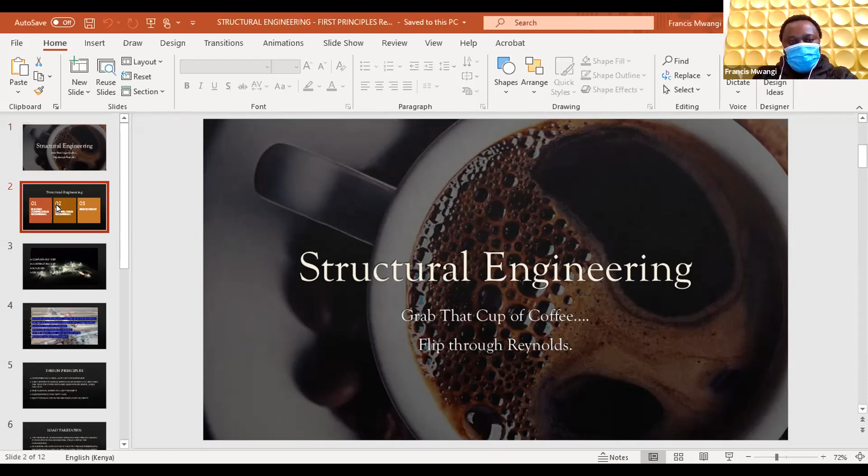So I would say grab that cup of coffee, flip through Reynolds. Reynolds is that book that every other time you'll need for you to be able to do your designs in structures. I hope the presentation is loading quickly.

So in structural engineering, I'll say there are 3 broad categories that one would consider: the building construction engineering. Basically, this is structural engineering for the buildings. You work with architects, quantity surveyors, and the basic built environment fraternity. There's road construction engineering, where you might be involved in box culverts construction.

I think there's been a technical error. Hello? There, he's back. Sorry about that, guys. Engineer, we've lost you a bit. Hello? Yes, we had lost you. I think you need to go back to the second slide and just rush fast. Poor connectivity on my end.

We were on the second slide where we say that there's building construction engineering. This is construction where we are working with the built construction industry members. There is road construction engineering where you might be involved in box culverts, normal culverts, and of course there is bridge design. All these are elements of structural works that you might be involved in. On to the next slide.

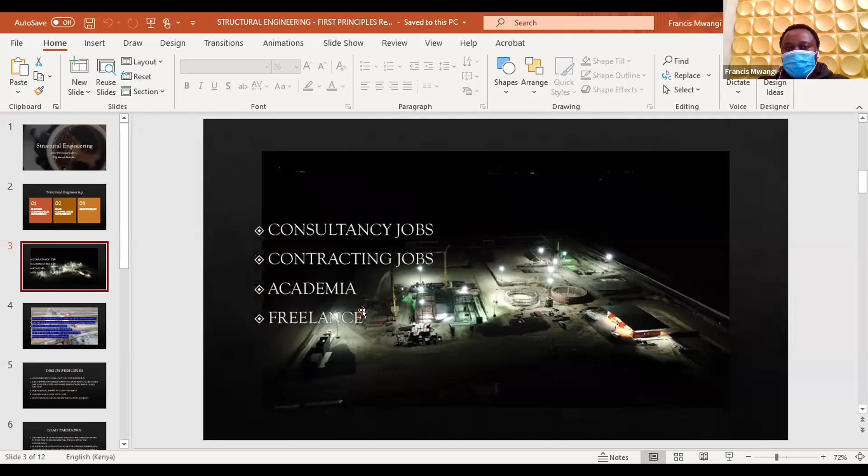The other area where you might find opportunities is academia and freelance. As somebody rightly mentioned, you might get chances to do your projects as PJs, personal jobs. You need to actively look for those because they will determine how well you are able to navigate in this engineering world.

So how do you go about it? I would say look for that opportunity and then play the hand you are dealt. When I was leaving school, I knew I would be a civil engineer all through my life. But when I was looking for that opportunity, I was unfortunately not able to get a civil engineering post. So what I got was a structural engineering post, and I had to work through that to ensure I was agile enough to take what I was dealt and come up with something.

I hope this is still clear. It's telling me I'm unstable on my end.

The hardest experience to acquire is the first 3 months. So if you get any opportunity, just pick on that opportunity. 3 months down the line, you could always decide on what you want to do with your life.

I would say keep your campus notes very close - the TOS notes, the traffic notes, and in this case especially the design notes that you have. Those are going to be critical as you start your first 2 years.

Attend the mentorship programs. You've been told before in the keynote - attend the mentorship programs, and then choose the ones that suit your profession.

I would say also know where to refer. People and books are your resources in your first 2 years. After that, you are supposed to be able to handle the projects on your own. I would also advise you to register as a graduate engineer at the earliest possible.

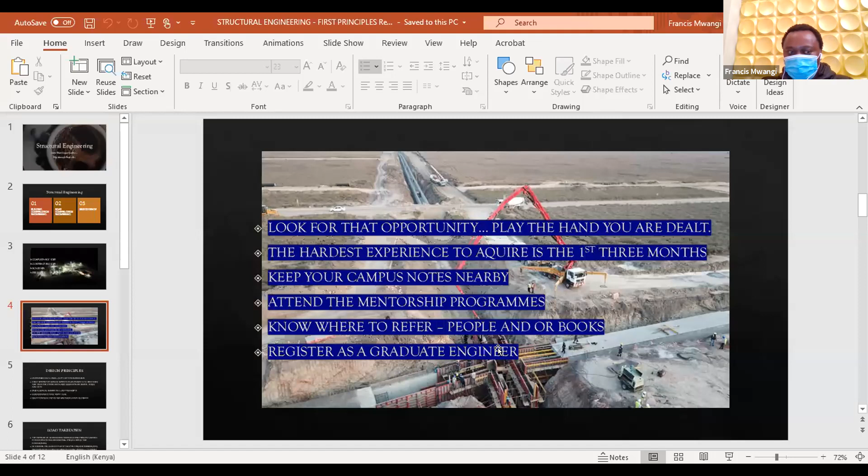So what do you need going forward? In design, you need to know how to design the elements, one at a time, just like the notes state. Start with the roof design, down to the slab, beams, columns, bases, then other ancillary elements like ramps, stairs, and lifts. The most critical element is load takedown.

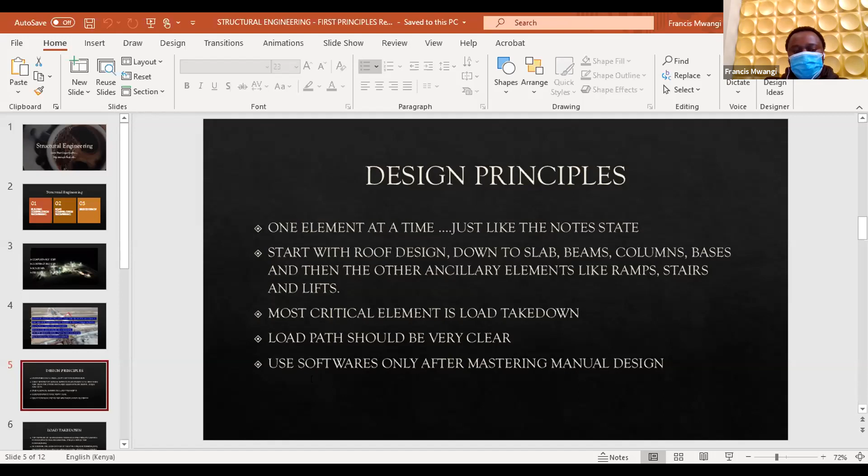The load paths should be very clear. Load path basically means how the loads are being transferred from the topmost level all the way to the foundation. It is also advisable to know how to use softwares in your design, both for design and presentation of the same, but those are advisable to be used in subsequent years after you have mastered the manual design.

So what is load takedown? This is the exercise of determining the loads that will be carried by the structure and carrying them down to the foundation. Basically you determine the loads carried by the floors, and those are transferred to the beams. Beams take them to the columns, columns to the foundations, and then the foundation disperses the weight to the ground.

Determine the design code to use for loads determination. The BS codes, Euro codes, or American codes can be a good start. There are very many other codes, and it all depends on where you are designing your works from. When the Kenyan standards are fully developed, then we are going to move to the Kenyan standards - they'll be the guiding codes for design purposes.

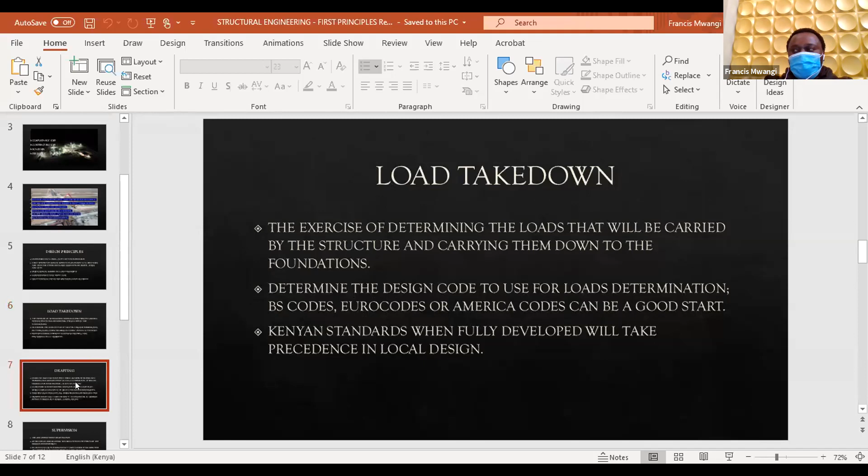After you're done with your design, then you should move to drafting. Basically this is presenting the works that you've done. You should learn to draft in your first 3 months, whether you're working in a design office or for a contractor. It will be critical for registration.

Please note that all these first 2 years that you're working on, you're trying to build a career for yourself. In that building of a career, you will eventually require to register to have the full benefits of engineering. I would say learn basics from personal initiative and then move to more complicated stuff with help from those with experience. This is what I did - I just took YouTube and went through the AutoCAD basics of drafting.

I think he's gone silent again. Engineer, can you hear us?

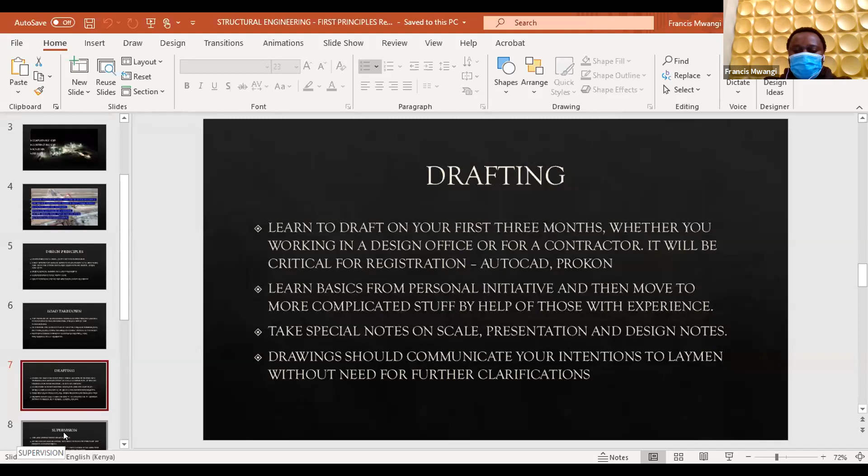Drawings are what will communicate your works to the external audience. Basically, your drawings should communicate your intentions to laymen without the need for further clarification. If you have sent your drawings to the site, you don't have to be on site to explain to the person laying the formwork or doing the steel. You don't need to be on site for them to understand your intentions. They should be able to pick up on this, and you are only required to go there to do confirmation through supervision, which would be the next thing.

The aim of practice is registration, and of course, enjoying the full benefits of the profession. So after design and drafting, you need to follow up through the project by supervising. Be guided in the supervision process by either your employer or a mentor if you don't work in a design office. There will come a point where you find yourself with a side hustle you've been working on, but you might be employed in academia, or employed in a contractor's site office. So you might need to get somebody else who would take you through the supervision bit. You need a mentor, because you wouldn't do supervision on your own, at least for the first 2 years.

I would say pay special attention to reinforcement spacing, cover to reinforcement, and formwork placement. Basically, formwork for engineers is just to determine the size of elements. If the column is given as 200 by 400, the formwork will determine that.

For cover to reinforcement, ensure that you have spacers holding the rebars back from the formwork. For reinforcement spacing, just follow the drawings and ensure that what has been drawn is what is being implemented on the ground. And critically, check reinforcement overlaps.

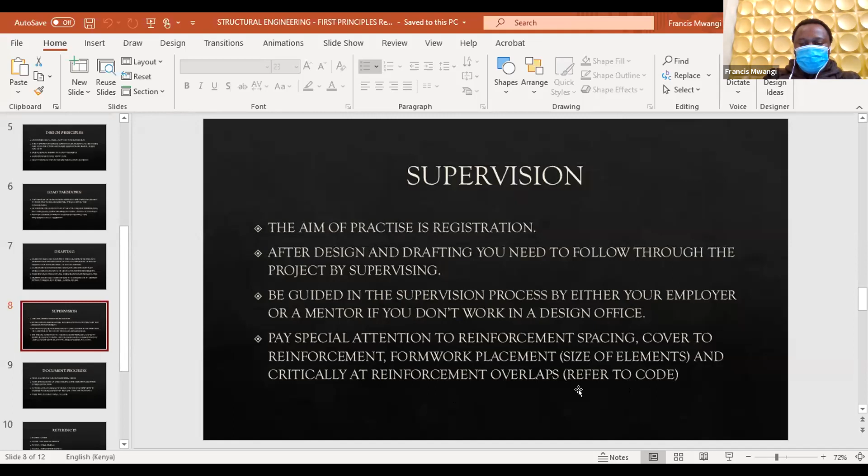When you have elements where reinforcement cannot run through, like a 13-meter span, and the rebars available in the industry are 12-meter spans, you need to know where to break the rebars so that you have adequate overlaps. It's advisable to get this information from the design codes. If you're using BS standards, you would get that in BS 8110, for example.

You need to document your progress as you go along in practice. The first 2 years are where you'll find most of your challenges, and you need to document those challenges well enough to present them to the team that will finally be assessing your registration. I'd say have a logbook for documenting tasks, note everything you are doing, and take special note of challenges in the industry and their possible solutions.

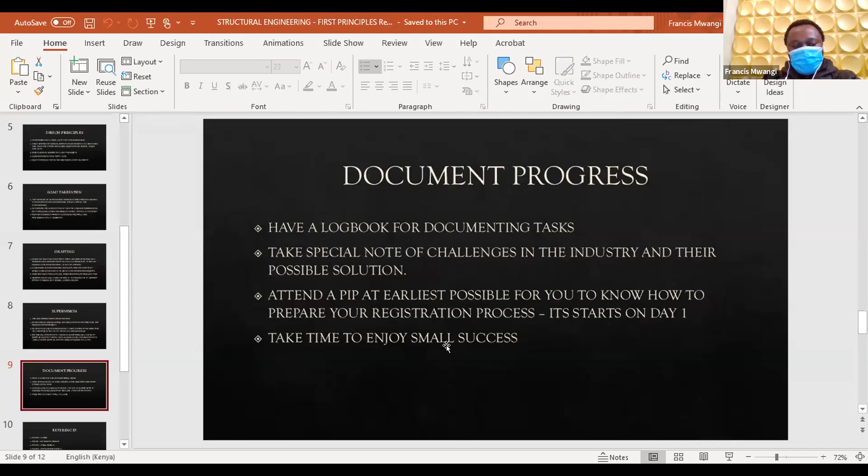I would also advise members to attend professional interview preparation at the earliest possible time, to know how to prepare for your registration process. Remember, it starts on day one, not after 5 years. If you get the chance, start at the earliest possible. I would also say take time to enjoy the small successes. If you've been involved in a project that is finalized, remember to pat yourself on the back, because that was due to your achievements and your strength.

The references that might be useful as you start your first 3 years would be the British Standard Codes in Kenya, and Eurocodes, which we are in the process of adopting. For load calculations, you might refer to BS 6399. Then there's BS 8110 for concrete design, BS 5950 for steel design, BS 8004 for foundation design, BS 5268 for timber design, and BS 5400 for bridge design. I would advise members to look for Eurocode equivalents of these to have an understanding of what the industry is about.

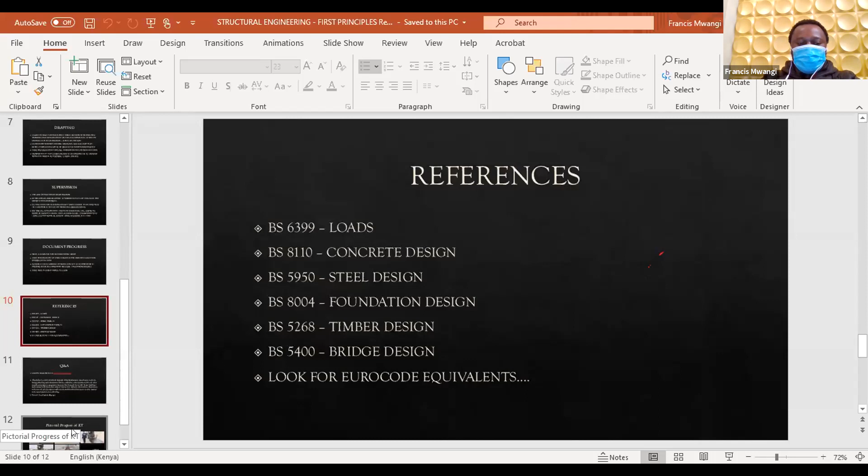I'll jump the question and answer session and go to a few of the things we are doing at Konza Technopolis. The first frame, if visible, shows we are in the process of laying a GCS on site, that's graded crushed stone. The second picture shows the utility tunnel, which will host most of our utilities, including that water pipe there, a potable water pipe.

On the other racks, we are going to have solid waste systems. On one side we'll have the wet utilities, and on the other side the dry utilities. We have bitumen spraying, which will be explained better by whoever is taking roads or materials. GCS again on another section. The middle frame below is a junction of the utility tunnel, and on the extreme right is the water reclamation facility, or sewer plant if you wish.

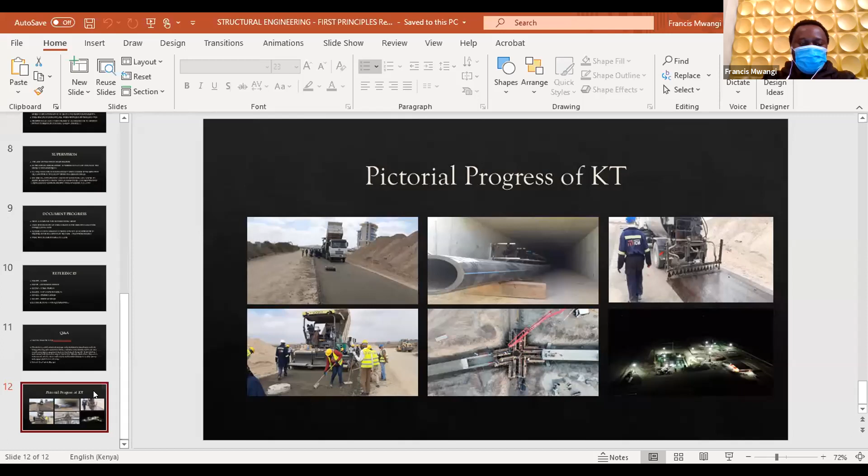So I would take questions and answers, but if my minutes allow, I might want to present to the team a video of what we are doing at Konza Technopolis as I close it off.

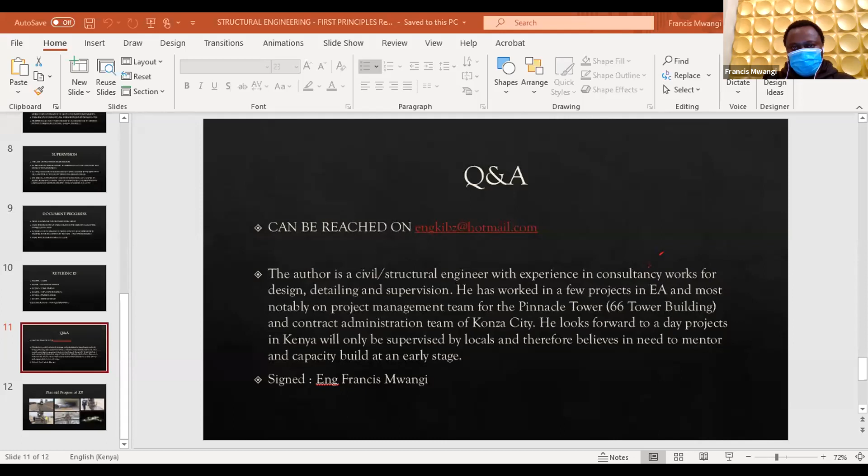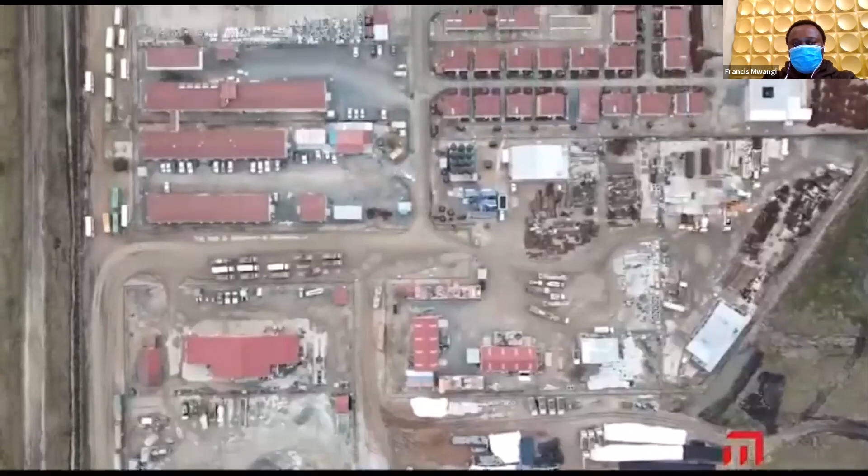Is it visible now? Yes, it is. Okay, so this is the contractor campsite for the main project that we are doing. It's a 40-kilometer street network with water and all the other subsurface utilities, basically the horizontal infrastructure for the project. It has both the offices and the accommodations for the contractor.

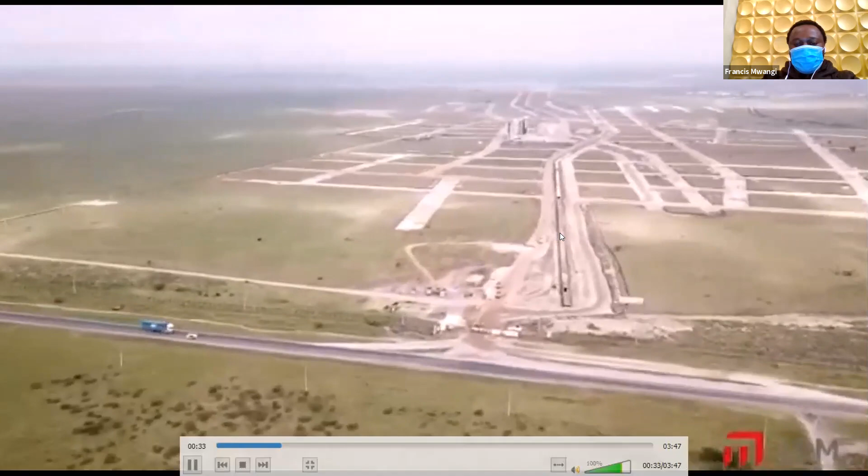And that is Konza Technopolis. Just before you get to Konza Technopolis, there's Mombasa Road, and then those are the roads that we are doing in the city.

You'll note that the utility tunnel I was talking about has been partially covered. There are some sections that are already done, and backfilling works are already ongoing in those.

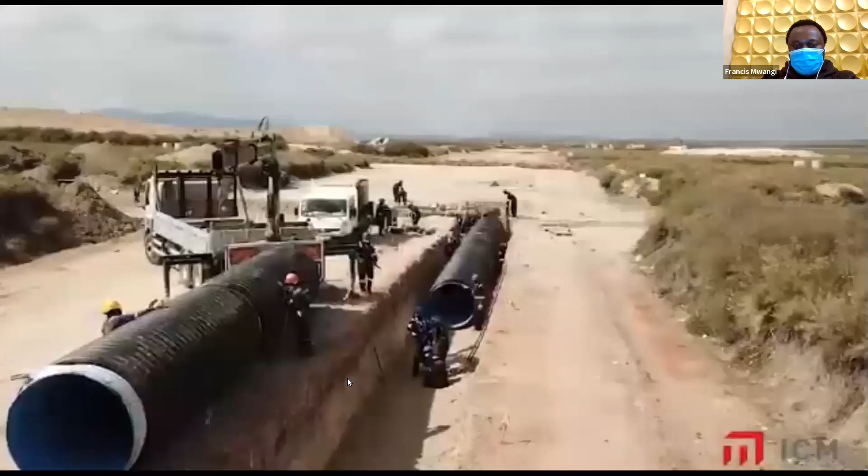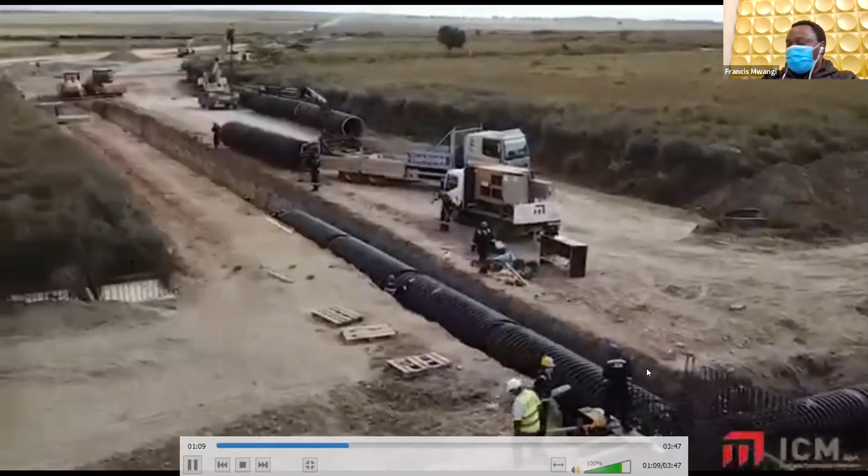You have the subsurface utilities. This is a stormwater drain pipe being placed, and welding happens at the junctions for it to have connectivity with the manholes.

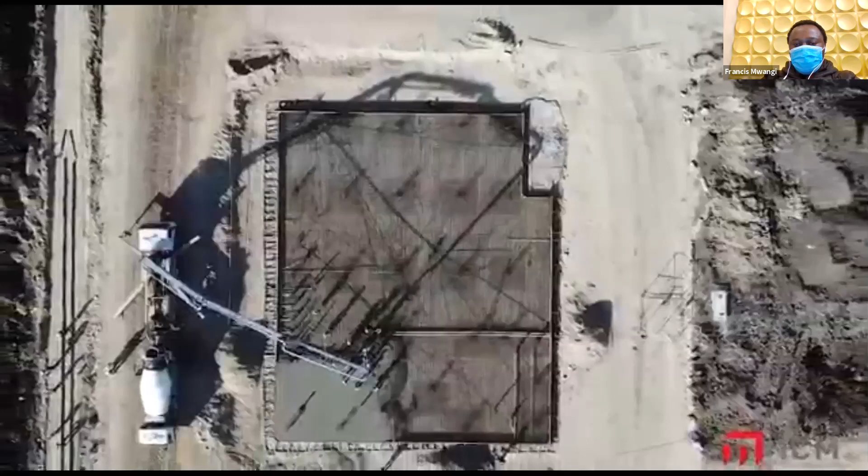This section here is the water reclamation facility, or sewer treatment plant if you wish. That's the progress. That's one of the mechanical offices. It was being cast.

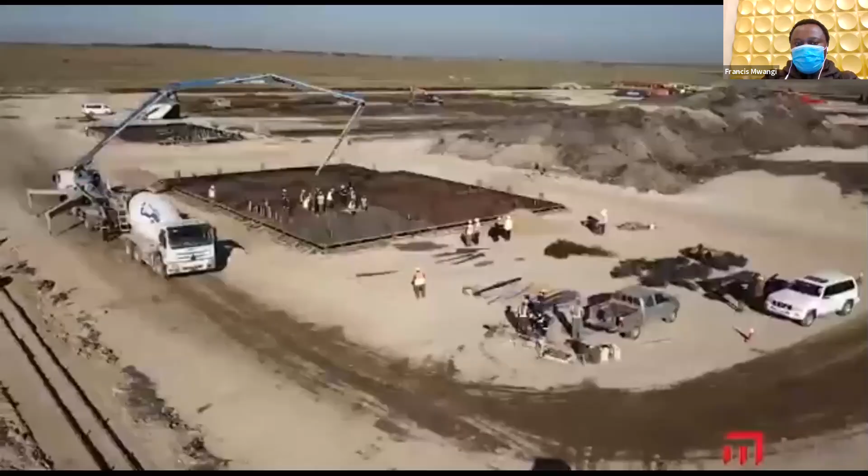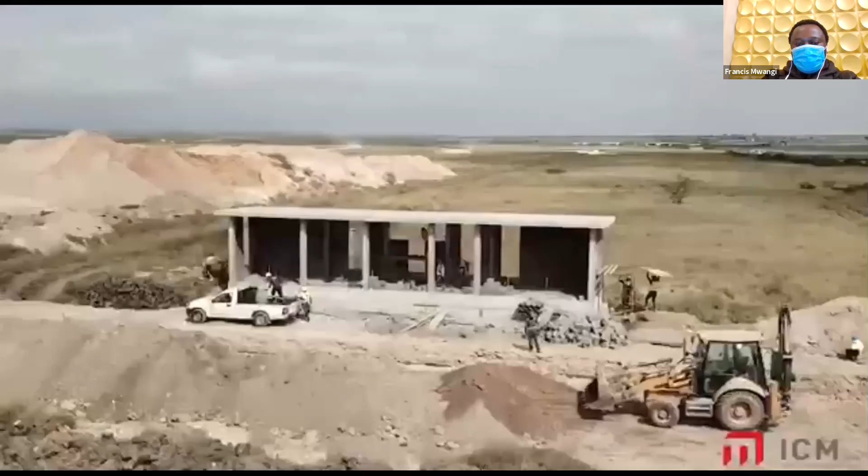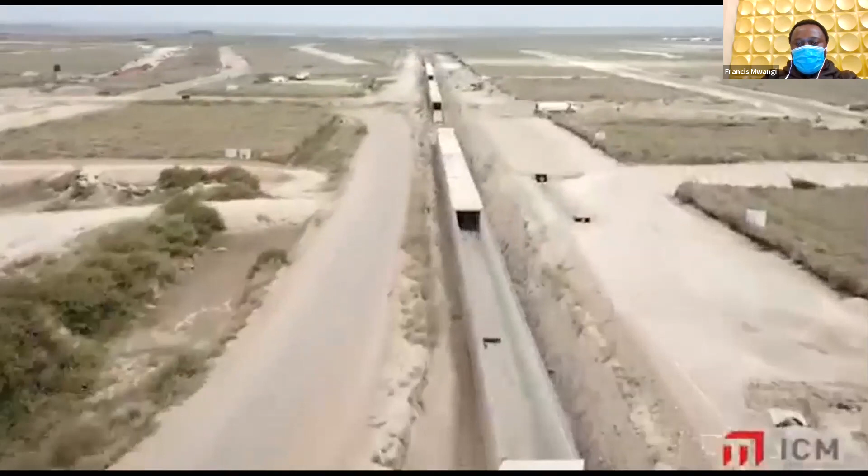The progress is two months late in this video, so there are some things you'd note in the pictures that have progressed much further. These here are called electrical cabins. It's where the electrical transformers will be placed for reticulation of power to the parcels or plots.

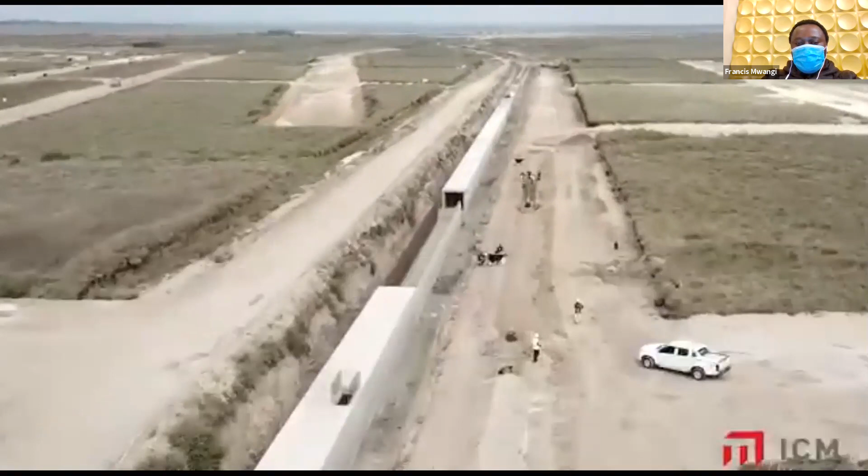That's part of the utility corridor. It runs across the whole city. As we said, we need the utilities below ground, and whenever we are doing repairs, we don't want to be cutting the roads or something of the sort.

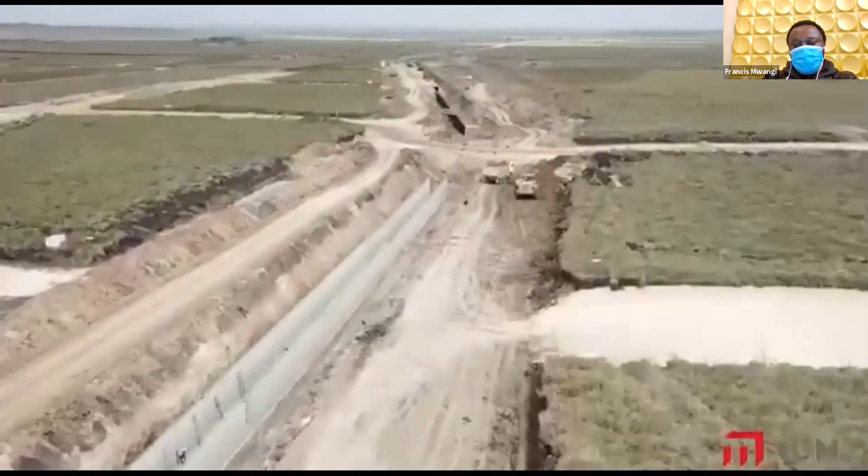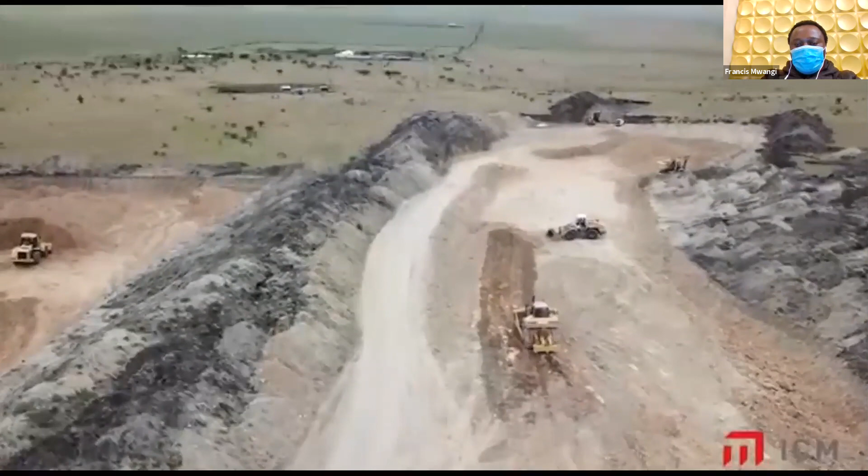This is the section that will have our water treatment plant. The water treatment plant is envisioned to cater for the 200,000 to 300,000 population that will come into the city.

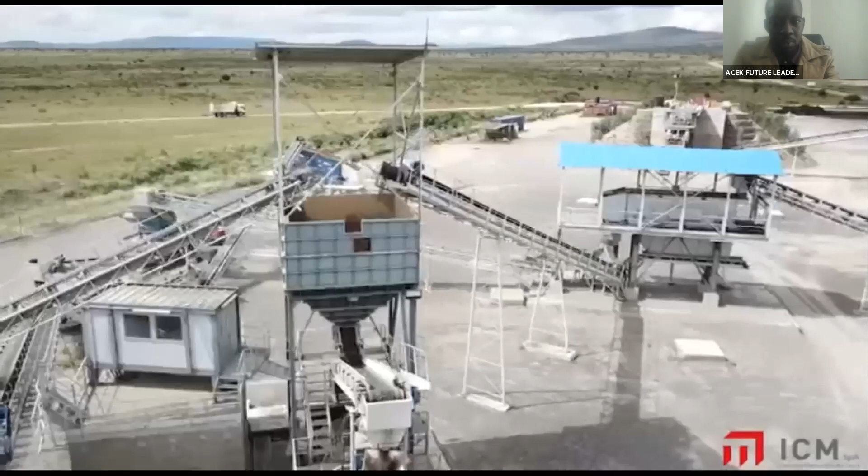That's the quarry crushing, the crushing plant at the quarry. This is off the city on the Kajiado side.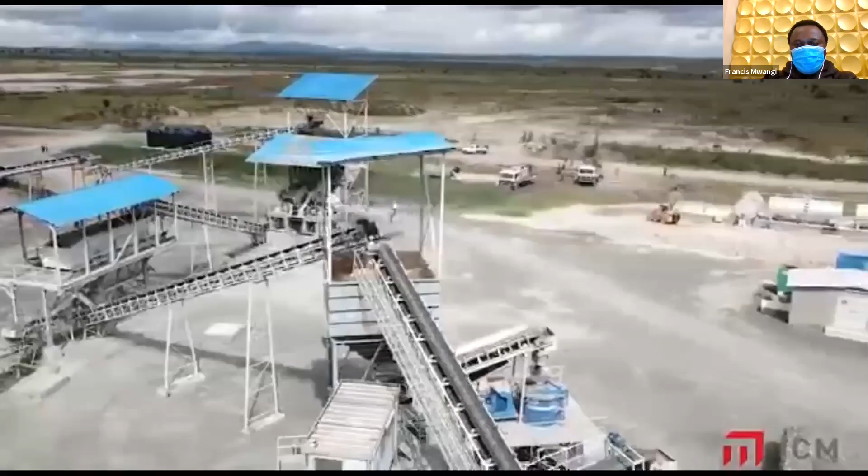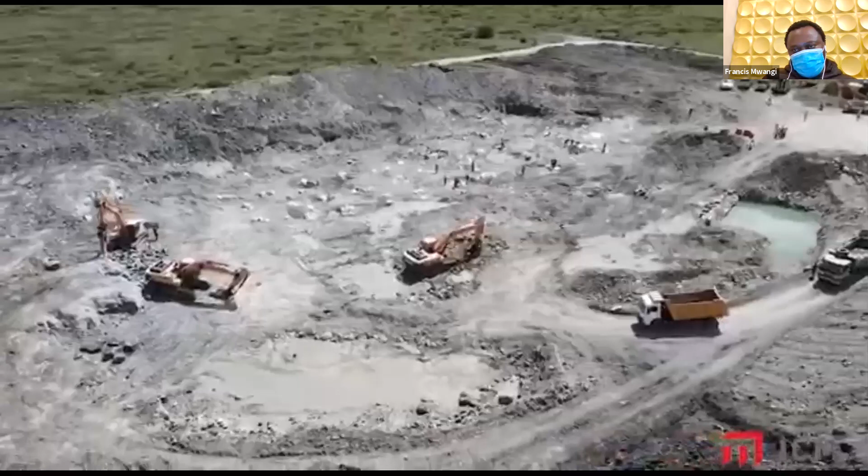In the background, you might see the SGR station, the Konza SGR station. This is the quarry site where we are borrowing our rocks from, and the rocks are gotten by blasting.

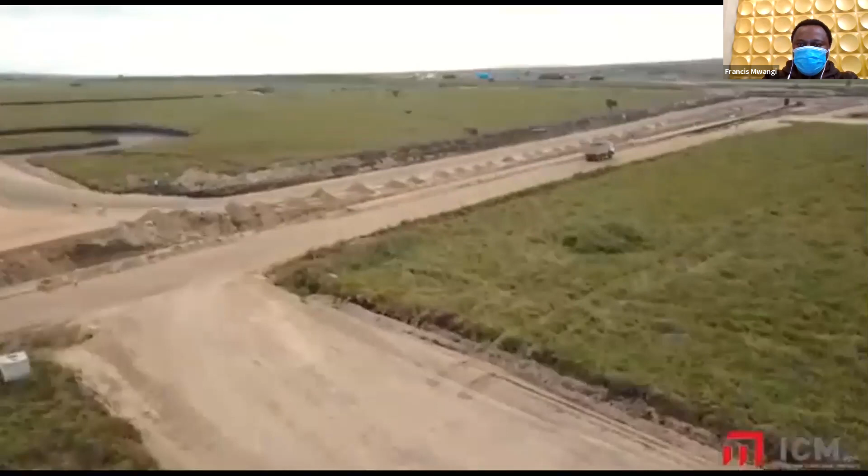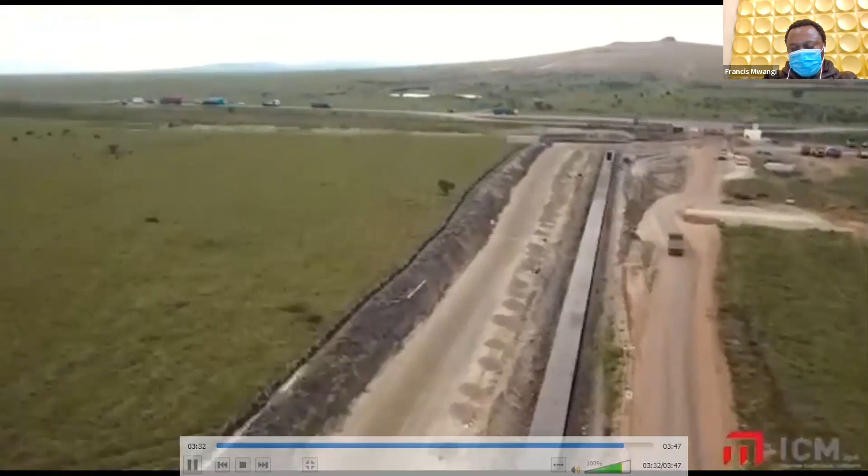Material is transported back to the site, of course, for laying on the different areas. So that will be it from me. Thank you.

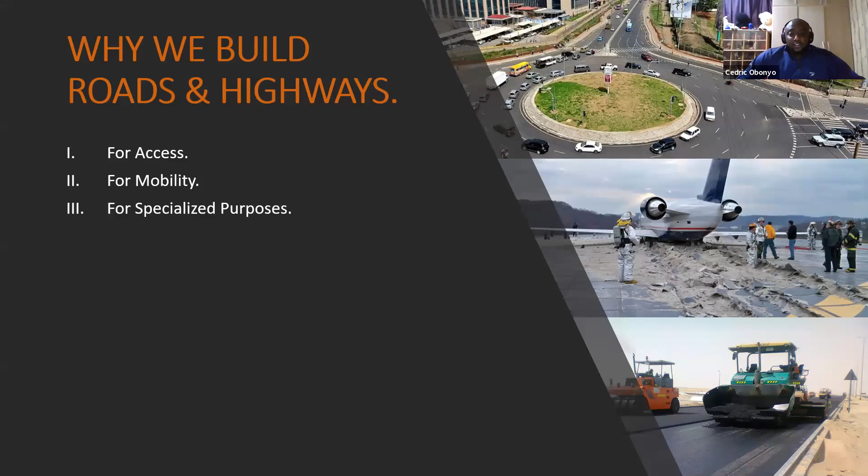Now, in the first 2 years, you are going to interact with something called, or rather I put it to myself as the expected, unexpected interactions. You're going to have interactions that you would not even imagine in your life you're going to have. Yet the reality of the matter is they're expected. Number one, you're going to have a lot of interaction with very senior and experienced engineers in the industry in highways and roads. Some of them have practiced for many, many years, 20 years, 15 years, 30 years. And you are there fresh from college, you want to try your hand in highway engineering, you're going to interact with those individuals.

Also experts from other sectors, like for example, experts from the claims sector, experts from environment, but these are individuals who have been there for a long time. Actually, in Kiswahili, they say, wamekula chumvi. They've been there for a long time. Also, you're going to interact with skilled workers that have been operating these equipments we see on the road for many years. Some of them, they tell you they're working in Malindi in 1978, and they're still working today, an operator. So you're going to have to interact with those kind of people.

And also, you're going to interact with those non-skilled workers, people who have just been told, come now, here's your daily wage, start doing this. So as an engineer in the highways section, transportation, you're going to interact with all these people on a daily basis.

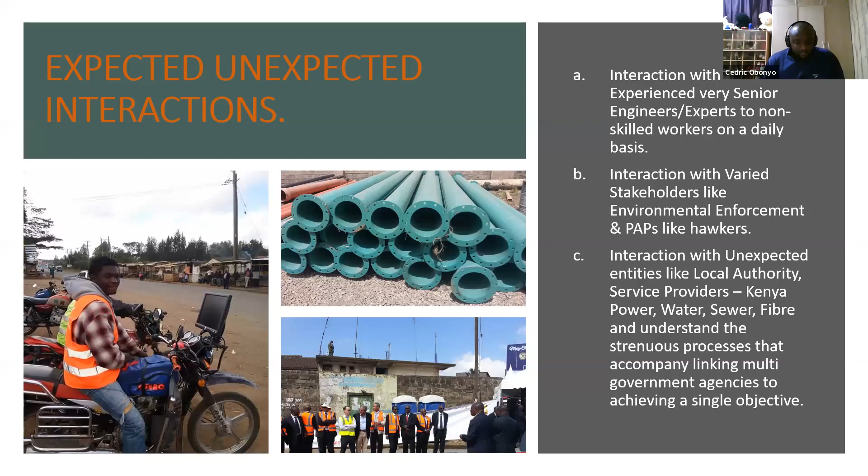Now, I'll talk about your working environment. The first 2 years, immediately you leave college, you're going to throw yourself into a working environment. The first thing that hit me when I left college is the long hours of work that you have to put in highway and road construction. This is because of numerous variables and fixed elements. For example, there's the weather elements. You plan to do work and then, like now, we have July and September, so most road works doing earthworks have stalled somewhere.

There's also specialized material that we sometimes use in road construction that is imported, and it delays in coming. And then the timelines of execution: some of the programs that you're given by the client to implement are very squeezed. So you have to put in a lot of hours of work to achieve them. So you need to be ready to enter office at 6 o'clock in the morning and leave office at 7.

For me, for example, when I left college, the first job I got was the Kisumu International Airport rehabilitation. I used to get in to work at 6 and leave at 9:30, 10 every single day. So that is the environment you need to be prepared for. Prepare yourself to find yourself inside it.

The second item in the environment you'll find yourself in is you're going to encounter severe ignorance from the public in terms of road construction. For example, news reporters will come to site and they don't know the difference between an excavator and a grader. So they call everything a bulldozer.

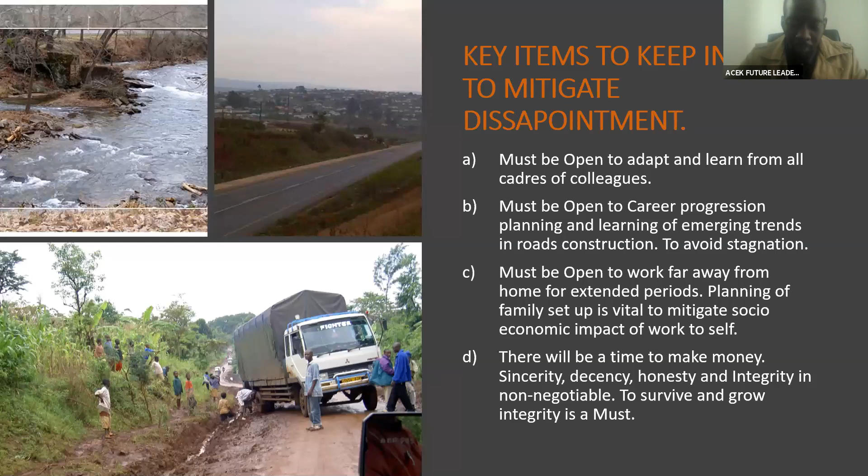Now, when you're doing engineering school, it is open for you to do structures, water, or highways. So I asked myself, why would you pursue highway engineering? Number one is the satisfaction that comes with the before and after. When you go to site or design a road where there was nothing, and then see the final product, it's a very, very good feeling. Number two, the satisfaction of impacting society with amenities and facilities that shall be used and exist for many years.

Meaning, you are going to do work that is going to exist beyond your own existence. Because these roads and highways are designed to last for more than 100 years. So you're going to create an impact on society that is going to last a long time. So it's a good thing, I think, to do something not for yourself, but for society. Number three is that when you do highway engineering, you're going to expose yourself to a lot of diverse environments and cultures, and you're going to meet very many people.

I remember when I left college, I was taken in when they were doing the Kisumu airport. My RE was a Boer from South Africa, Mr. Patrick Keynes, I've not forgotten him. The surveyor was a guy from the Netherlands. So the cultures and the people that you interact with when you're doing highway engineering are so diverse, because our road projects have a lot of different people from all over the place.

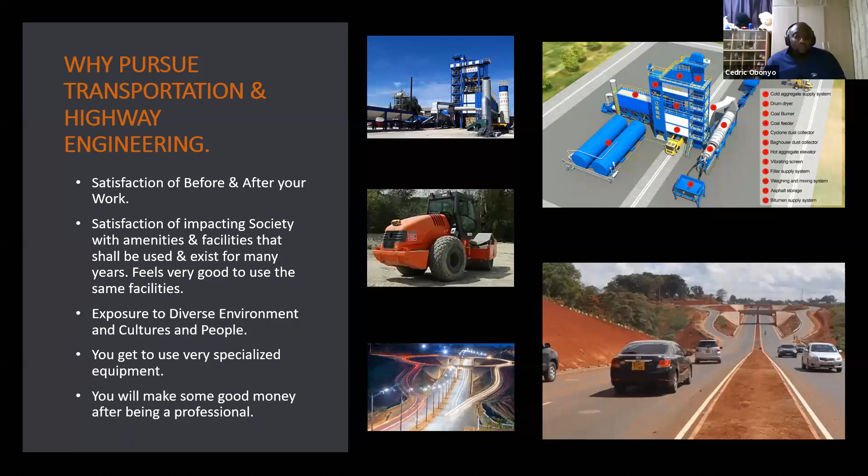Now, that is why I end my presentation on the environment within the first 2 years. I didn't want to bombard you so much, but I hope you enjoyed it. And if the moderator will allow me, I'll just show you a few photos of what I've been talking about. Engineer, can I do that?

Yes, as long as it's fine. Wait, is that? Sorry. Sorry. Just a minute. Oh my God. How do I? I'm trying to get it. Just a minute. You can do it a bit later. Yes, fine. Let me look for it. Okay. I promise I will allocate you some space. Okay. It's fine. Thank you for your time, and I appreciate it.

Thank you so much, Engineer Cedric Obonyo. I too had been privileged to work on a highways project. Sorry, I'm the coordinator, I'm still admitting guys. I was privileged to work on a highway project, the Thika Road, Lot 2. And there's one point you mentioned about ignorance from the public. I faced that as a very junior engineer on Thika Road. So on Thika Road, this is what used to happen.

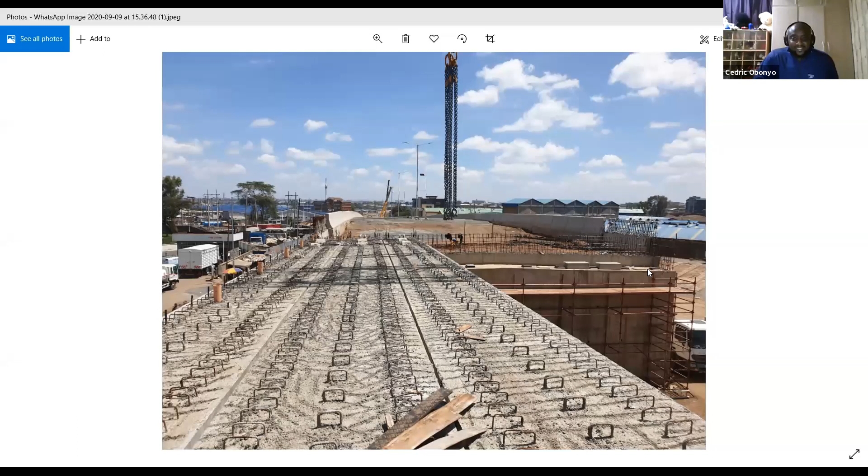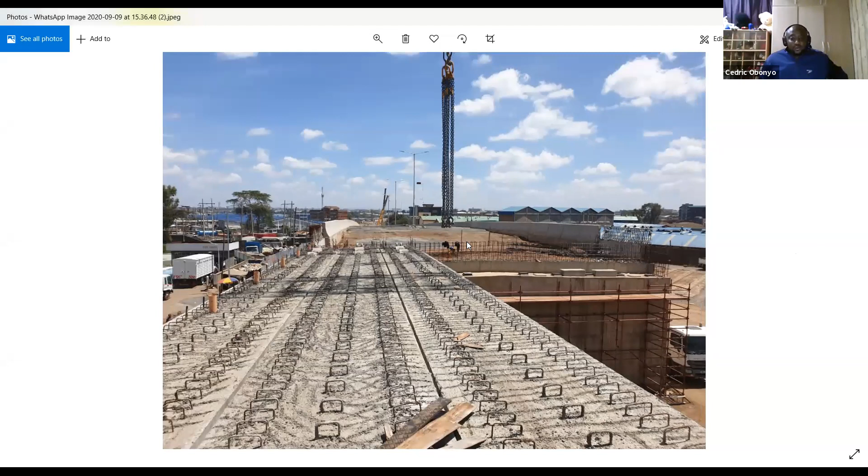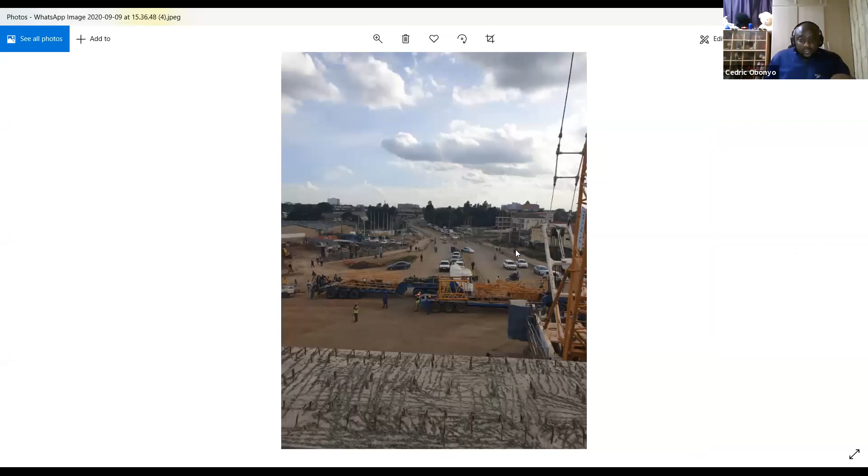So we had to change it. We could not do it. So we tried to go above the sewer line, to separate the traffic above. So we were doing beams. You see these are beams; there were 30 beams across the deck, and each beam was actually 200 tons. It was a post-tensioned beam, 200 tons per beam. But the beams were not cast on top of the structure. The beams were cast down.

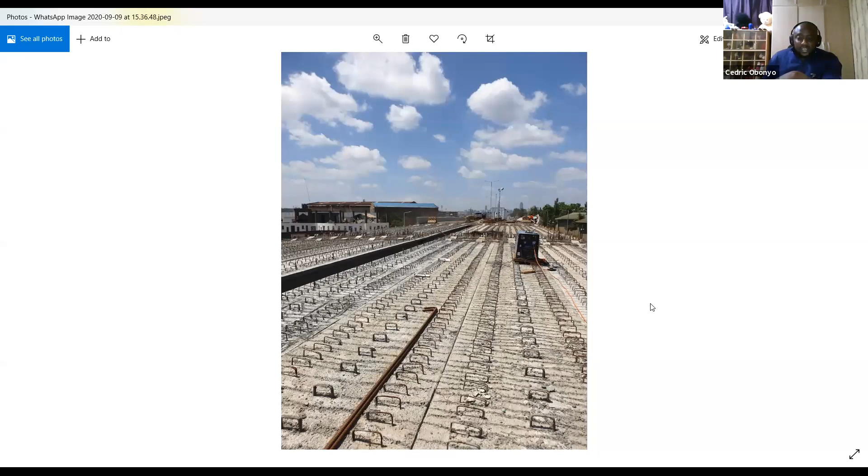That is why I was telling people highway engineering is very interesting. The beams were cast down, and then we had to lift them to come on top of the bridge. So this crane that you are seeing here is a crane that can lift almost 260 tons, a 260-ton capacity crane. So this beam here was about 194 tons. So they were cast here. Can you see my cursor?

So this was the casting yard here. So we cast here, then you bring it down on a dolly, this truck here, and then you lift it with the crane, with, of course, people controlling with some ropes on the side, and place it here on these piers. So it was very interesting, because it's something that is very hard to experience somewhere else apart from in highway engineering. What else?

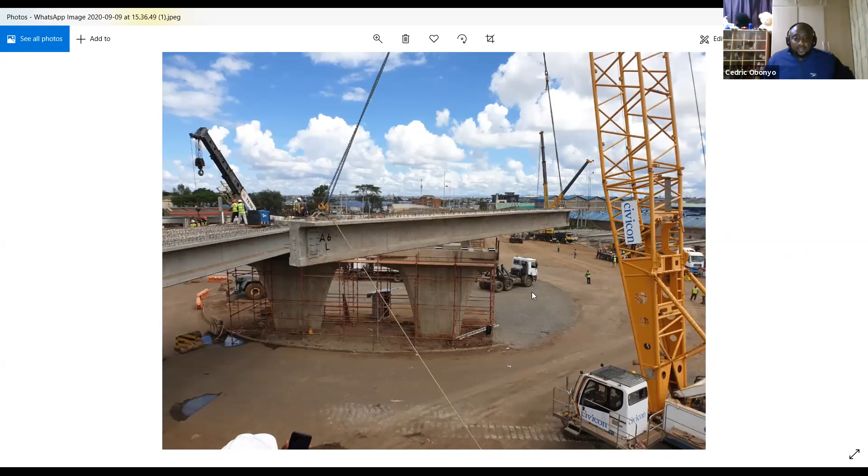Sorry. So these are us now placing the beam. So you are placing 1, 2, 3, 10. There are 3 sections, so 10, 10, 10 to make 30. And then this is just a short video of the crane lifting up the beam to place it on top here. So the crane lifts it and places it here.

I think for me, that's what I wanted to share, just to show the people that it's very interesting to do highway engineering. Really get to experience these kinds of things. Thank you. I'm done.

This GIS will help you map all the pipelines, sewer lines, utilities, and appurtenances, and you'll create an effective geodatabase that helps with efficient maintenance and future development and expansion. So when other branches of engineers want to do development, like a road or something, they'll just come and say, give us your geodatabase. You'll just produce that database and they'll know everywhere what is where, so they don't get shocked when they excavate a place and sewage spills everywhere.

It also helps in designing profiles, especially when you want to do a new pipeline. There's a tool in QGIS called the profile tool. You just key in elevations and coordinates, and it gives you the image from the satellite, draws the pipeline where it's supposed to pass, and plots the profile very nicely without so much fuss.

You won't even need many surveyors, you may just need one more person and your GPS. It also gives you good ways and routes for repair works, pipe bursts, and satellite links, so you can always do survey and link other works that people have done in that area and place.

And number 4, we have wastewater. This is environmental engineering, and this is the area that I love so much with all my heart.

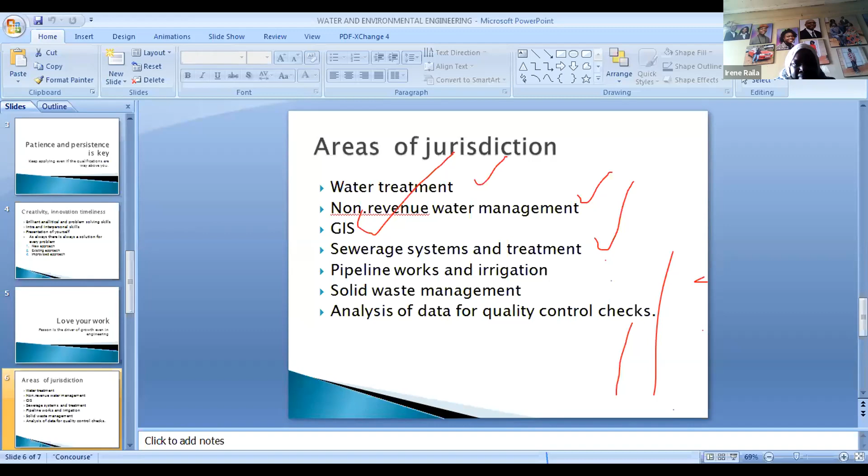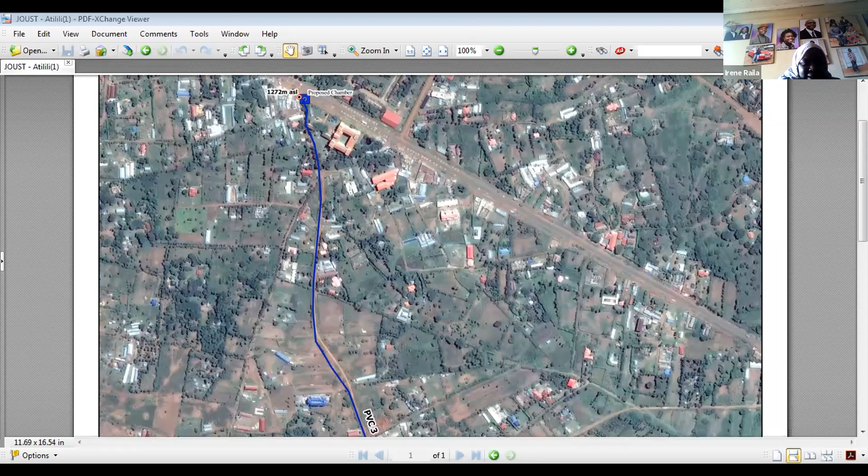I want to say to the people: get registered. When you get out, immediately get registered with the professional bodies and work closely with senior engineers for guidance and learning opportunities.

I wanted to ask most of us, as we do career progression in water and environmental engineering, to please take an interest in solid waste engineering in a deeper look, because you can see it is being overlooked, and you see the way solid waste is really treating us in an abnormal way. Yeah, thank you.

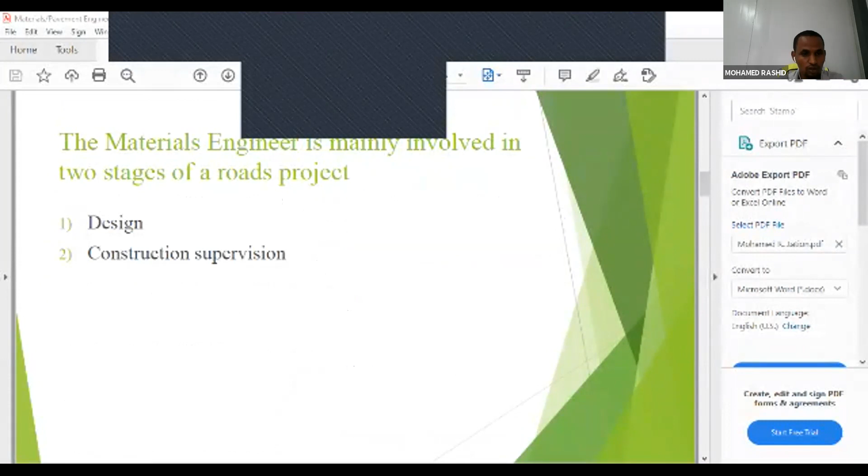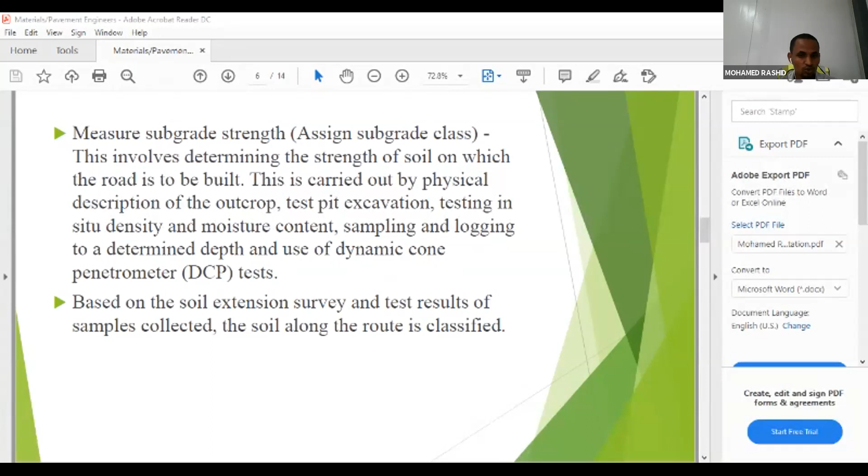Measure of the subgrade strength. When we say subgrade strength, this involves determining the strength of soil on which the road is to be built. This is carried out by physical description of the outcrop, test of what we call pit excavations. This will help us assess the vertical change in soil profile, and also visually you are supposed to delineate or subdivide your alignment into soil, according to how the soil changes. Remember, you are dealing with nature, and nature is not uniform.

So you are supposed to also do test pits in order to assess the vertical change in the soil profile. You are supposed to take samples from those soil pits and do laboratory analysis. You are also supposed to do in situ bearing capacity testing using a device called DCP. Based on all this activity, we assign a subgrade class. This will also form a major component in the design of the pavement structure.

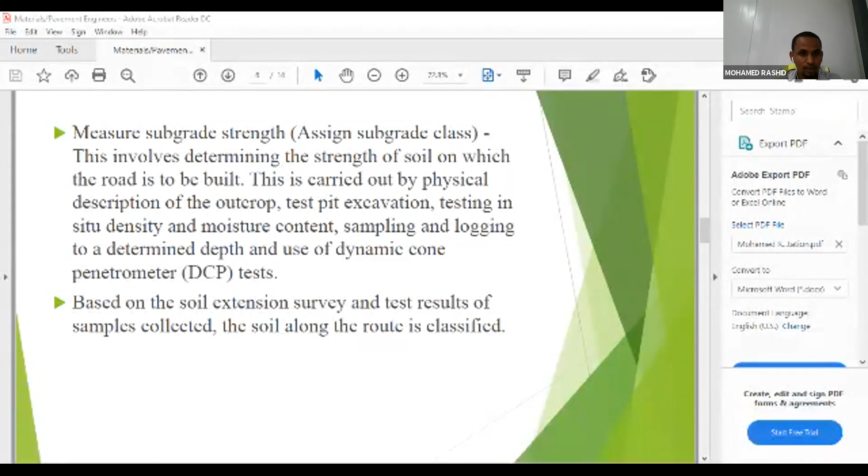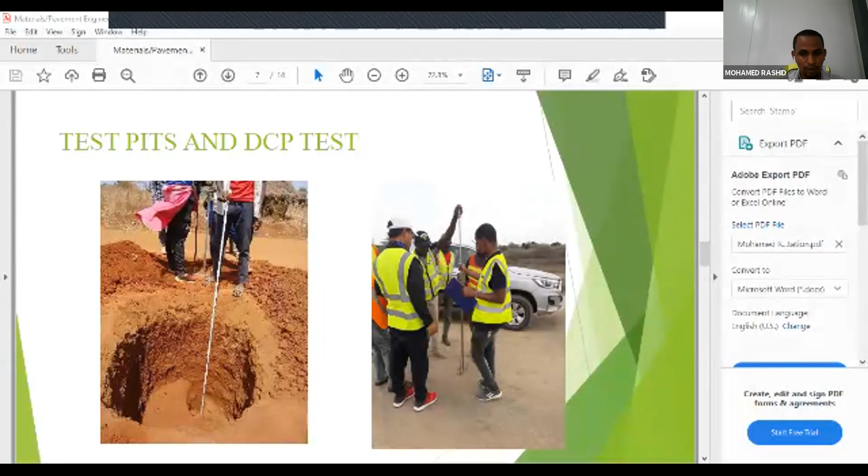So as we move to the next slide, it shows how the test pit looks like, and also how a dynamic cone penetrometer test works. This will help you measure the subgrade in situ bearing capacity, giving you the in situ bearing capacity.

The next activity is the choice of materials. Remember, we are supposed to build our embankment or pavement structure above the ground, using naturally occurring materials or gravels. So as a material engineer, it's your responsibility to source for those materials. We also need to remember that availability of suitable construction material within the project's vicinity plays a vital role.

So it is the responsibility of the material engineer to source for construction materials, and also to assess the quality and quantity of the material. What you need to know is that during road construction, contractors are paid for haulage. That's why the government or client hires a material engineer, to ensure we have suitable material within the vicinity of the road alignment.

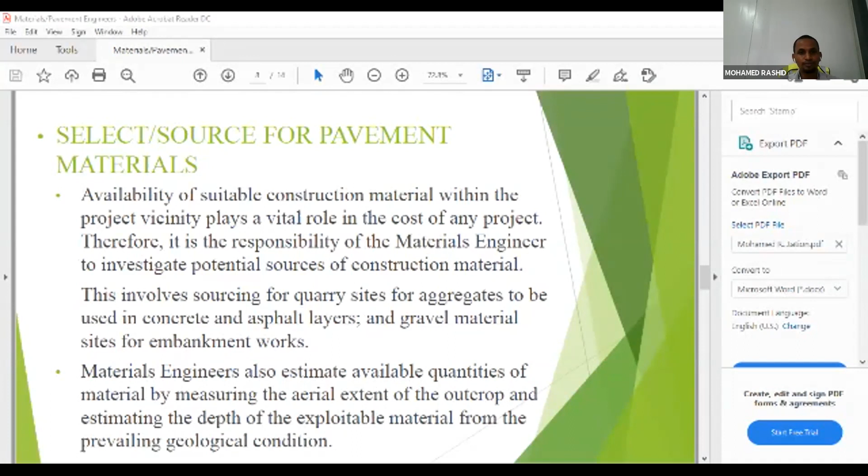So as we source for this material, here are some of the considerations. Number one, standard of the pavement or the project road. Number two, overburden thickness. Before you start exploiting a certain material, you need to check the overburden - is it economically viable? Does it make sense?

Number three, ease of exploitation. Do we have obstacles, things like mountains or rivers? Do we need to build culverts or temporary drifts that could turn out to be very expensive for the project? So it's the responsibility of the material engineer to ensure that his point of selection is accessible.

Also, he needs to check the material is in sufficient quantity. Remember, when construction starts, the contractor has to make a big investment - setting up machinery, setting up his crusher. So you need to ensure it's sufficient in quantity. He also needs to check the quality of the material that he's recommending.

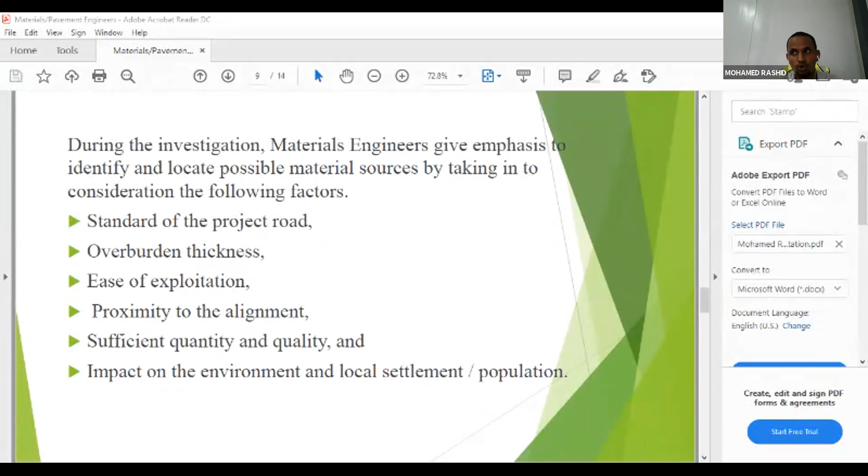Quality: mostly you are also required to have some knowledge of geology, how rocks behave or the nature of the rocks. Some rocks are acidic in nature. That's what you also need to know. With rocks which are acidic in nature, one of the signs is that they have pores. What shows you that they have pores? They absorb water, high water absorption capacity.

When you mix your asphalt using rocks that have high water absorption capacity, the likelihood of that rock having low bitumen affinity is very high. So when you use rocks that have low bitumen affinity in your asphalt mix, the road is going to undergo what we call premature aging because there's no bonding between bitumen and aggregate. When you have premature aging, the road looks very old within a very short period and starts deteriorating.

And if the road starts deteriorating immediately and it was designed to last for 15 to 20 years, as a material engineer, you are going to be in trouble. So you need to ensure that the quality is good. So the last thing in the design stage, as we move to the next slide, kindly move to the next slide, is the selection of the pavement structure.

Remember, you have collected all your data, the traffic data is there, the subgrade material, the foundation soil, you have assessed it. You have assessed the source of embankment material. So after comparing all the international standards plus our local standards, you need to come up with an economically viable pavement structure. With that, we need to consider the likely level and timing of maintenance, number one. Number two, probable behavior of the pavement structure.

For example, in hot areas, you need to think very carefully about using asphalt concrete. Instead, what the client also recommends is we use what we call dense bitumen macadam or DBM together with the surface dressing. So those are some of the things you consider. The other thing we consider is, of course, the economic part, the cost. As an engineer, you should be very economical because we are dealing with limited resources, especially as a developing country. So I will move to the second stage, which is construction.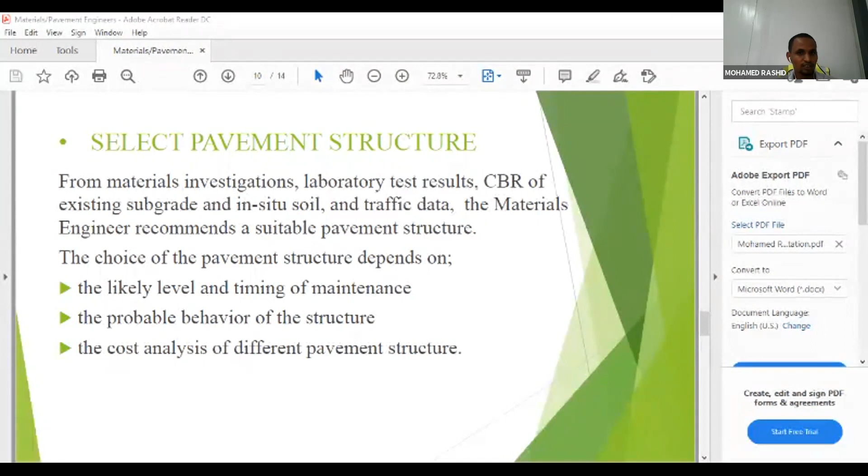The next slide. Construction stage, this is where all the fun is, depending on your motivation, how motivated you are. During construction stage, material engineers play a very vital role. They are the key person in road projects. The material engineer is the person who is blamed when anything goes wrong, especially when the pavement starts failing. So you need to be very careful.

The first thing as a material engineer you need to do is to verify design assumptions along the alignment. Why do you do that? Because most of the time, the engineer who did the design is not the same engineer who is present during construction. So regardless of what the design report says, you're supposed to verify the assumptions in the design report.

Also remember, during construction you have all the resources at your disposal. You have all the machines. You have a fully set up laboratory most of the time. So you need to take advantage of that and make sure that you approve everything according to the specification. The next thing we need to ensure as a material engineer during construction is, in addition to the sources of material indicated in the design report, you also need to source more borrow areas, of course, considering quality and quantity.

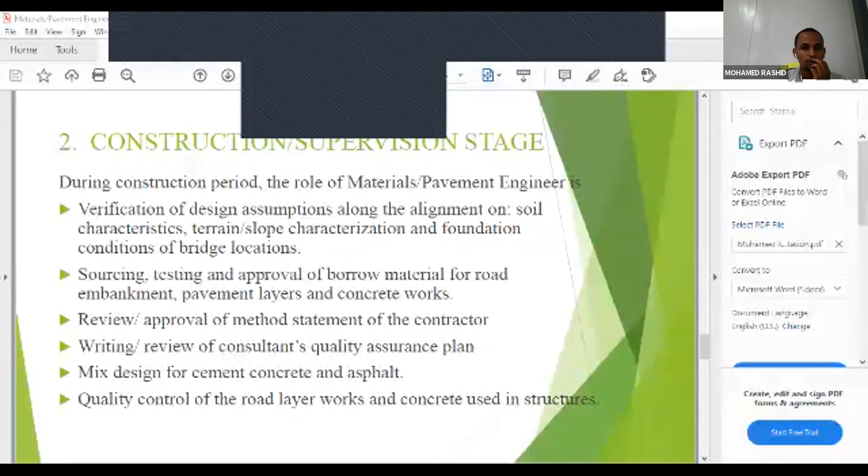So what's required of you as a graduate material engineer? Number one, if you want to pursue this, you need to work in a laboratory with the technicians. You need to learn how to do the tests, okay? One of the key roles of a material engineer is how to operate a civil engineering laboratory. That is one of the key components of a material engineer.

So you also need to know how to do the tests yourself. Remember, in construction, there's a lot of cheating, okay? So technicians, most of the time, do cheat. So you need to learn how to do the tests yourself as a material engineer. A good material engineer knows how to do all the required tests by him or herself.

You also need to have what we call a problem-solving mindset. Especially during construction, there are a lot of challenges and different problems. And the person who is called upon to solve problems is a material engineer. You should not be rigid as a material engineer. You are required to go to site and solve problems.

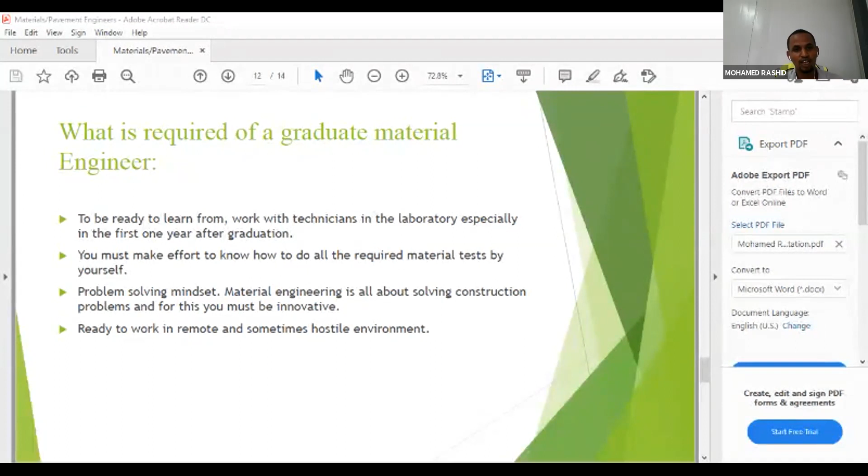So as a graduate engineer, you should be present. You should try as much as you can to be on site, not in a design office. Material engineers are required to be on site to solve day-to-day problems. Remember, in material engineering, there's no software involved. There's no sophisticated software that you can sit somewhere in Nairobi or in some office and solve problems from there. No, you are required to be on site. So make sure you grab any opportunity that will have you on site.

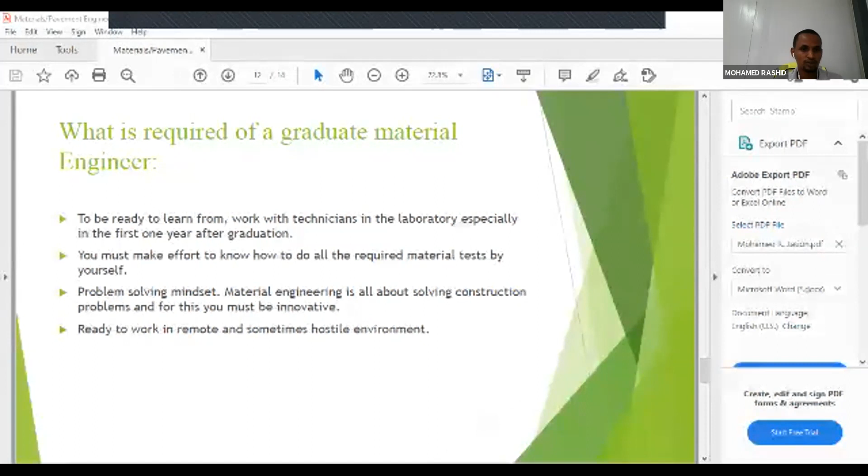The next thing is you should be ready to work in some very remote areas or even hostile areas, especially during design. Most of the time, the projects that require material engineers are out of town, in very remote areas. So for you to be a good materials engineer, you need to grab any opportunity of these projects that are out of town. That's how you will be able to learn a lot. Next slide.

Okay, so what are some of the pros and cons of being a material engineer? Well, let's start with the pros. It involves nature. Remember, you're dealing with nature, and one of the things with nature is it's not uniform. So every day you are encountering a unique problem. So that one is somehow an adventure, involving geology, soil mechanics, okay?

The other thing is it involves exploring new areas, especially during design. During design, you are required to walk. The vehicle is just following you, carrying your equipment. You're supposed to walk and assess the material by yourself. Remember, I said there's no software involved. So you're supposed to be physically on site, sometimes walking very long distances.

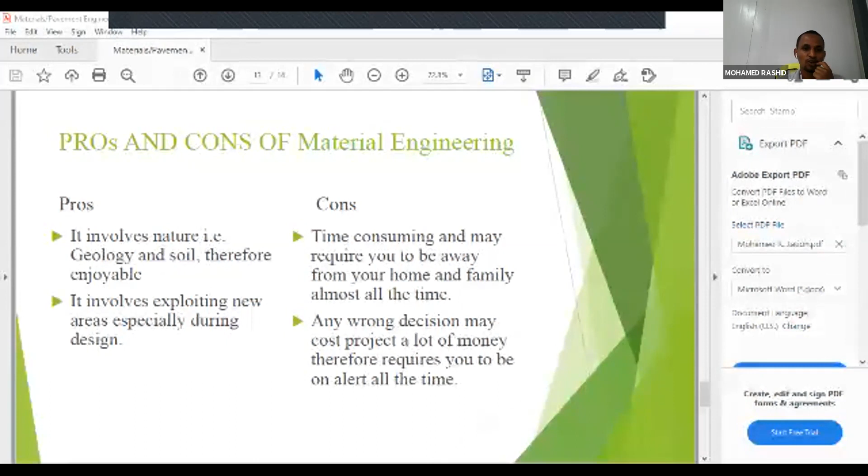Material engineering is all about making decisions, and you have to make sure that all your decisions are right. Otherwise, it's going to cost the project a lot of money. Whenever anything goes wrong in a project, the first person to be blamed or even fired is the material engineer. So you have to be alert all the time. So those are some of the issues. So as we move to the next slide. Next slide.

Yeah, so if you have good interest in road construction or material engineering involving roads, those are some of the references you can look at. They are very detailed about materials. Number one is the Kenya Road Design Manual, Part 3. The other one is Overseas Road Note 31. The other one is Ethiopian. You should also check manuals from other neighboring countries, like Tanzania has a very good manual.

Also, the Ethiopian Roads Authority Pavement Design Manual, Volume 1, has a very good, detailed, textbook-like analysis of what material is all about. The other one is AASHTO, 1993, which also has very good information on materials.

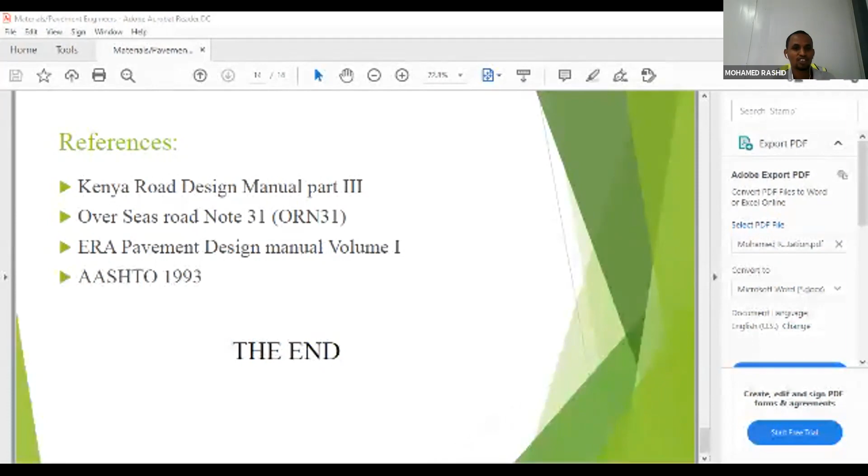Or I closed it too early. You had one more page. No, I think that's it. That is it. Thank you very much, Mohammed. Mohammed has been one of my mentorship soldiers. Do you remember one of the first mentorships we did in Sunshine? Yes. Thank you very much. Tuendelee hivyo. Welcome. Yeah, thank you.

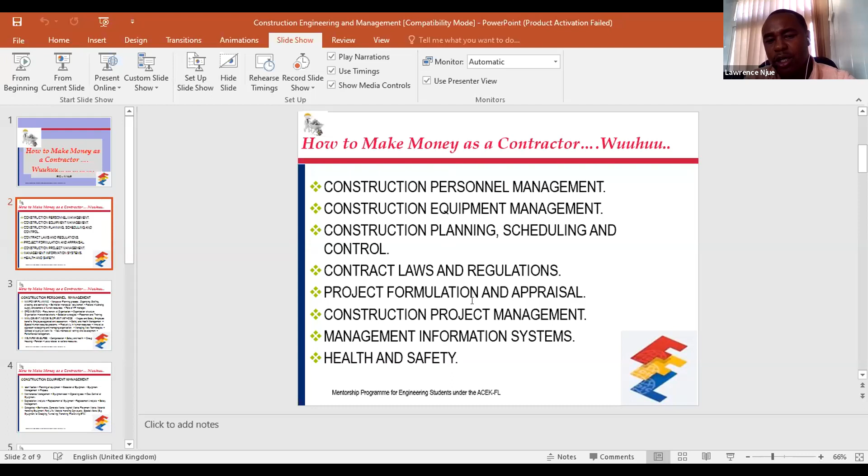And it entails just a list of what I've put there. You know, to understand personnel management, equipment management, planning, scheduling and control, laws and regulations, formulation and appraisal, and project management. In terms of personnel management, you have to understand people. Irene well discussed in saying you need to have good interpersonal skills so that you interact with the casuals.

What I normally say is that in construction personnel management, when you're a construction engineer, you have to understand what it requires to do that. I've done a master's at JKUAT on construction engineering. My lecturer used to tell us, you need to understand the anthropometrics of the site. If you're telling somebody to lay a curb, and you know that his position is going to either squat or bend, how long can a human being bend and be productive?

So that will allow you to know that I have a human being who can only deliver 100 or 120 meters of curb laying. I have somebody who can actually lay paving blocks for so many square meters. It gives you the production ability. And if you want the same human being to produce more, then what kind of other support and facilitation should you do? This is very key in construction, because construction is about money, how to make money.

If you don't estimate correctly how much output a laborer, a mason, a carpenter, a steel fixer can produce in a day, you're going to estimate the rate you're going to charge for his labor input wrongly. And that's why your rates are going to be poor: very high, so you don't win your bid, or too low, so that you go at a loss. So the personnel management part is first understanding the scope. Be on site, know what laborers do, interact with them, how do you motivate them and how do you produce.

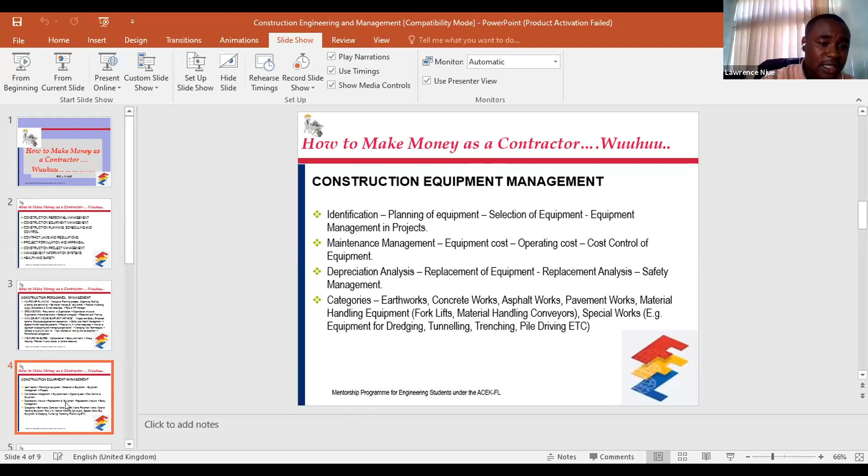The next one is, because I didn't want to talk a lot, I skipped something, no? The next one is on construction planning and scheduling. This is the make or break part of construction.

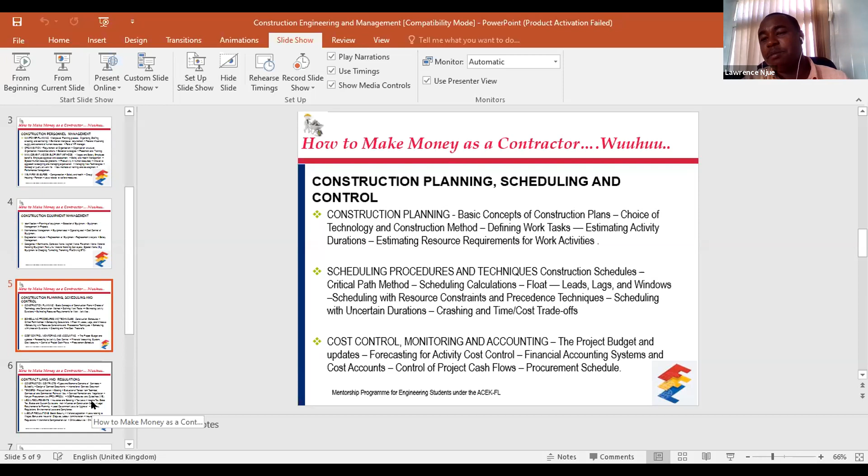I'm encouraging you, don't simplify construction, don't think it is easy. I tend sometimes to think it's more difficult than design, with all respect to the design process, because I've done it for a while. You'll never find in construction not understanding the design, but you have very many aspects of design where they'll be saying for specialist input. The specialist input is strictly a construction engineering aspect.

In this country, the two common ones are JBC and FIDIC. There are other bespoke contracts that are used, customized for specific projects. In very many scenarios, people play around with contracts.

I had an example just yesterday. Somebody actually called me, telling me that they did work worth 3.4 million. They're being paid 2 million and the contract sum was 2.8 million. It's a very young contractor who's beginning out and calling me to perform a miracle.

When you ask them, where did the 2.8 million come from? They say, we went to site, we made a BQ, we quoted for the job. So I told him the client did not even give you a BQ, he did not estimate the quantities, all the mistake was yours.

Since you're being paid 2 million because you have not finished the work, I told her the best thing you can do is finish the work and claim 2.8 million. But you'll never get even the 3.4 million you're claiming without finishing the works, because you estimated the works wrongly. So don't underpin what is your responsibility. Let's get the quacks out and come in as professional engineers for the money.

The other part is tender. You need to know how to tender, know the rules that you're using to tender. If an organization requires pre-qualification, how to prepare the documents for that, bidding, how they evaluate award technically and financially, and some of the rules.

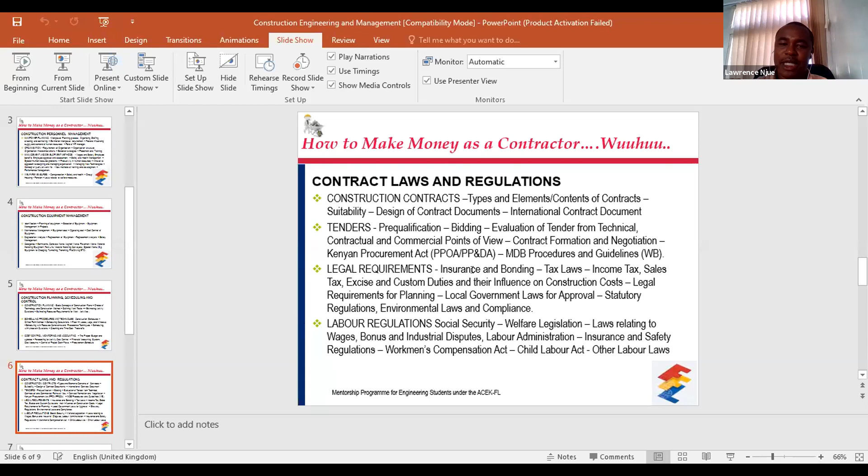The other thing is labor regulations. We discussed this on your side about the welfare of staff. You need to understand what you need to pay - NSSF, NHIF, which kind of deductions do you do? Paying their pay, which kind of insurances do you have, especially for sites? Other things of management - do you do bonuses and such other things? And the labor laws that guide performance. These are legal requirements or laws that need to be very well appraised.

The other one is project formulation and appraisal. This is where every engineer in this country - okay, I'm not interacting with all of them, so for the sake of not throwing them in one basket - I can tell you for free that very many guys will not tell you what is the internal rate of return for their projects. They'll not tell you what is the NPV, what is the benefit cost ratio.

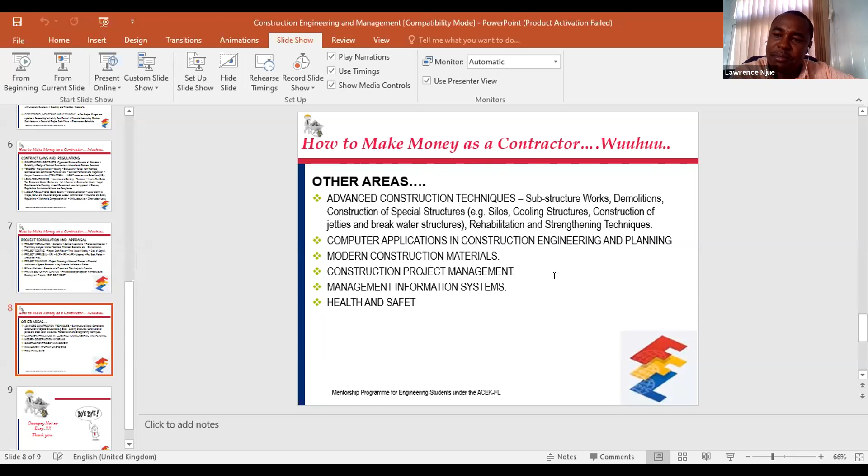Management information system is the same as application. Health and safety, sorry I missed a letter there, it's about safety of the workers and everybody on site. As a contractor, at the end of the day, everybody is here to be alive, so health and safety is quite important, especially when doing a project in COVID time.

So I know I said I'll show you how to make money, but it's not also that easy, and it needs for you to be involved.

As a closing remark, I'll just say this: engineering is not a joke, that's why they select the cream of the cream to get there. And in practice it is not a joke either. I've done a lot of my practice in both design and supervision, and my appreciation of construction engineering actually came because of the time I've taken in supervision.

Don't come and think that things will be academic. My first boss told me I did a beam and thought there was a mistake in the design. When he looked at it, he told me it's wrong. He's the current ACEK president. He told me: this is not class. In class, if you design the beam and it fails, you only lose marks. In real life, if you design a beam and it fails, do you know what happens? I said no. He said people die. Or the building collapses and people die. Do you want to die?

I said no. So when you come outside in the next two years, the mentality that you're going to be like somebody who did a different course needs to disappear. And what I can say, yes there is money, but like any other field, you have to go for it, you have to look for it. I hope that was an idea.

Another field I need to mention is construction claims and claims management. There's a lot of money in that. There are very many contractors given jobs because of connections, and they don't know anything. They need you as an engineer who understands the contract and the design to be their engineer in that company. And most of them, because they know how an engineer should be paid or how it works, pay very good money. But it can't start without you understanding what to do and what you're supposed to do.